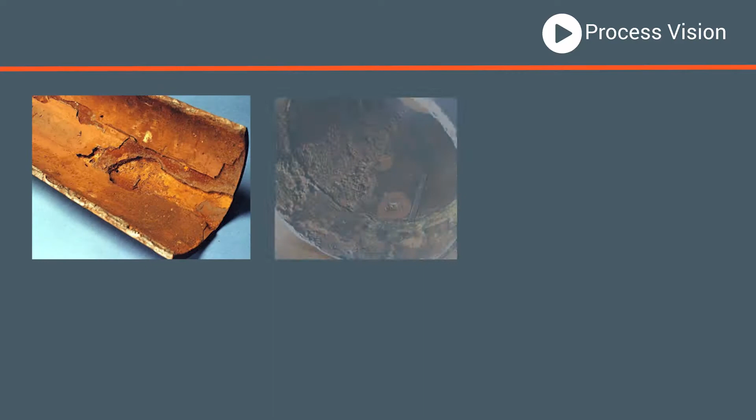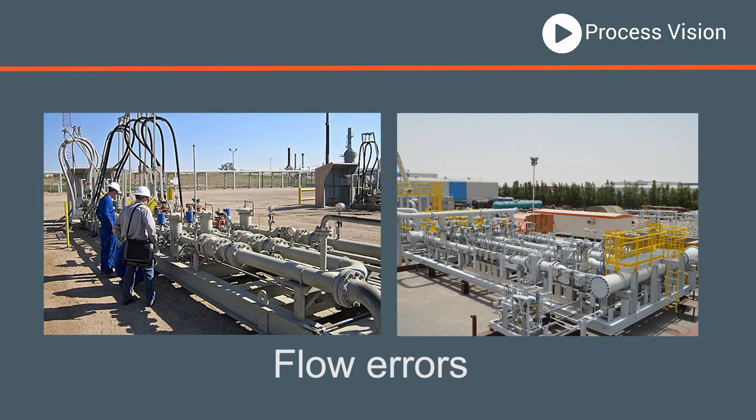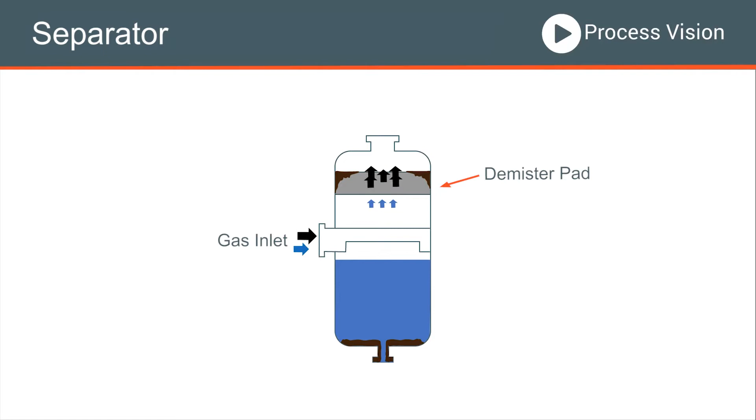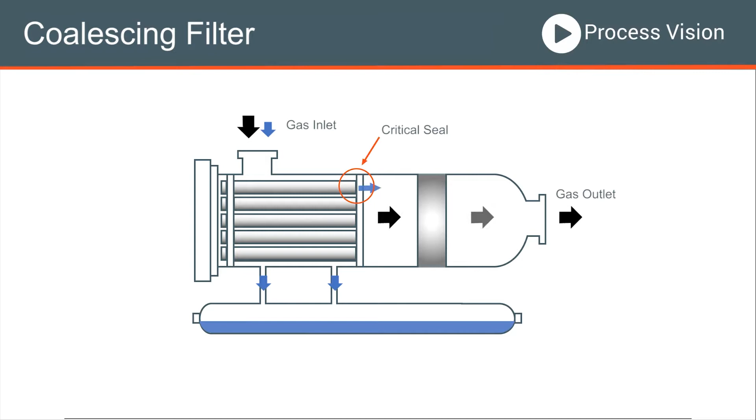Liquid carryover is the cause of the vast majority of process upsets: plant damage, foaming, explosion, errors in flow measurement, the list goes on. In the oil and gas industry, the way we separate oil and gas is quite critical, and yet there is nothing that will permanently and effectively monitor the gas separator's efficiency. And that leaves the operators in the dark, running processes downstream of separators and just having to cope with liquid carryover that happens on occasions or sometimes continuously.

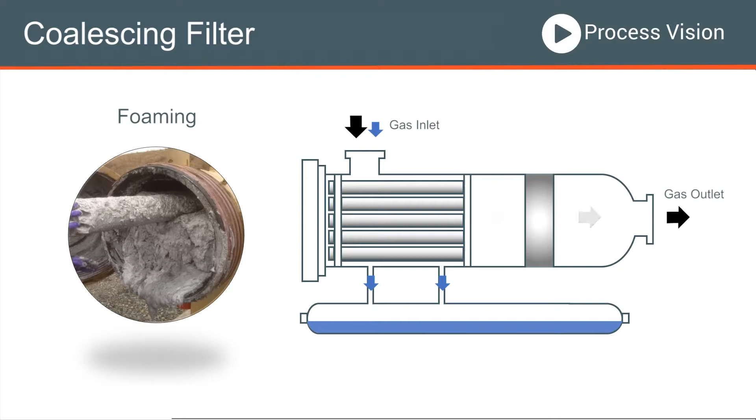A few years ago, we wanted to get our heads around how gas with low levels of liquid behave and perform this simple test. This 2-inch diameter perspex pipe has air running at around the velocity you might expect in a gas pipeline. We are injecting oil in the middle of the pipe.

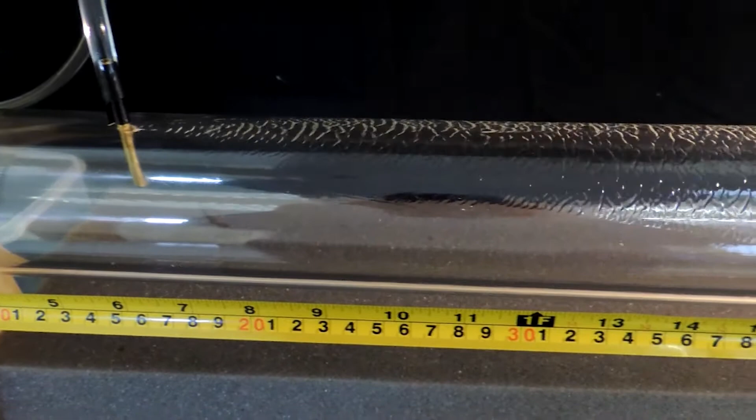As you can see, the speed of the gas throws much of the liquid to the pipe wall, and as we move away from the injection point, the liquid slowly makes its way to the bottom of the pipe. This is where engineering meets art, and you can see what is known as a full annular flow. The liquid forms a film around the inner circumference of the pipe.

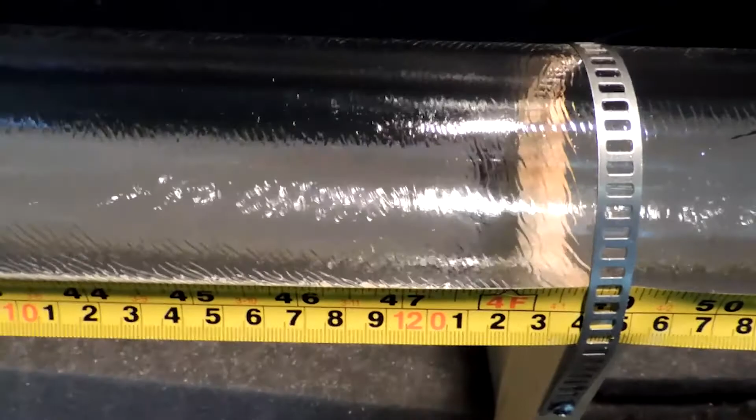Moving further down the pipe, more liquid travels to the bottom and starts to make a thicker layer. As the liquid is only moving through the pipe because of friction with the gas, the liquid layer at the bottom of the pipe begins to move slower than that on the side. The process of the liquid travelling to the bottom of the pipe continues under gravity and would eventually end up with a stream of liquid just at the bottom of the pipe.

So let's take a look at where liquids might come from in a gas network. Starting at the wellhead, water, sand, crude oil that includes natural gas liquids all come up with the gas as it leaves the gas well.

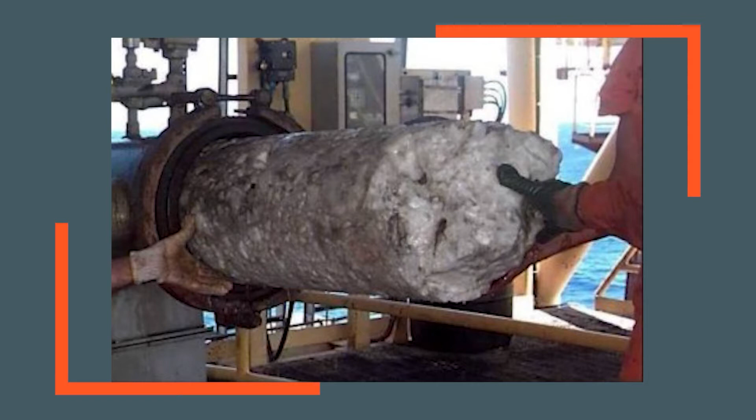In addition, liquids are added to the gas flow at the wellhead. Bactericide, corrosion inhibitor, and hydrate mitigation liquids are commonly present in the gas as it leaves the wellhead area. At this point, the only interest is to keep the gas flowing in a safe condition. Hydrates are the scourge of the industry, and we've got some work to do here, but we think we can detect hydrates at their initial stage.

Several gas wellheads are typically connected to a single gas processing plant. In this illustration, we've shown twin gas processing trains. In many gas plants, there may be 3, 4, or even 5 gas trains, offering some level of redundancy for maintenance. The first action with gas treatment is to remove the liquids and solids in the incoming gas.

This is the most important gas separation in the gas treatment process. The only thing moving forward into gas treatment should be gas. The first process, usually, is desulfurization. This process removes hydrogen sulfide and carbon dioxide. The most common method for removing these contaminants is to use an amine-based liquid.

In this example of a gas treatment tower, gas enters the tower at the bottom and makes its way to the exit of the tower at the top. The processing liquid, in this case amine, enters the tower at the top and makes its way to the bottom of the tower via a number of bubble trays. There is a reaction that locks up the CO2 and the hydrogen sulfide in an unstable salt in the amine.

The amine leaves the tower at the bottom, is then depressurized in a flash drum and sent to be regenerated. It is a high temperature process that releases the gases that have just been captured, and the amine then returns in a loop back to the top of the tower.

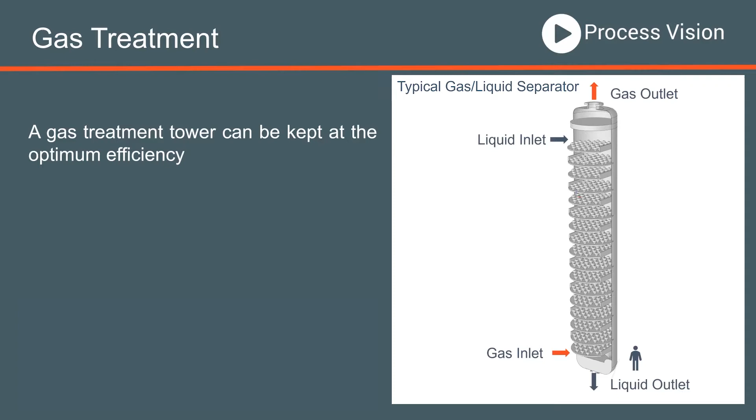There are several triggers for foaming in gas treatment. Liquid carryover causes two of the major triggers. In the short term, surfactants in the gas stream cause foaming. If it happens, the gas flow must be reduced by 50% or more and defoamer added.

The operator monitors the differential pressure between the inlet and the outlet, and once they believe that foaming is under control, gas flow can start to be increased again.

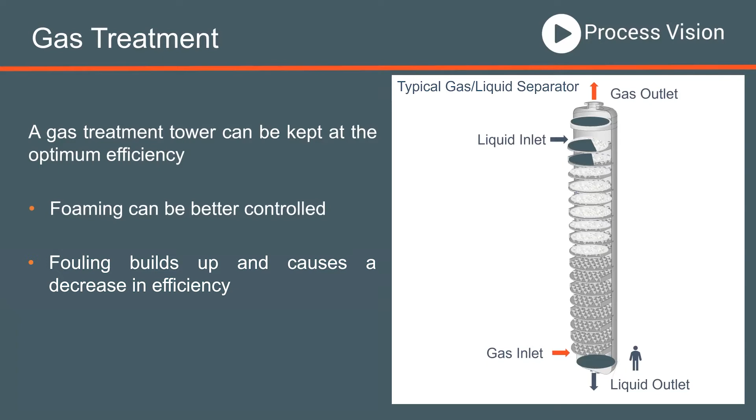Depending on the severity of the foaming event and the plant size, a foaming event can cost between $250,000 to $250 million. In the long term, hydrocarbons entrained in the gas stream will turn to carbon during the processing liquid's regeneration process. This causes a buildup of solids within the processing tower, and if not filtered out, can be a second cause for foaming. Foaming is a big issue with gas treatment.

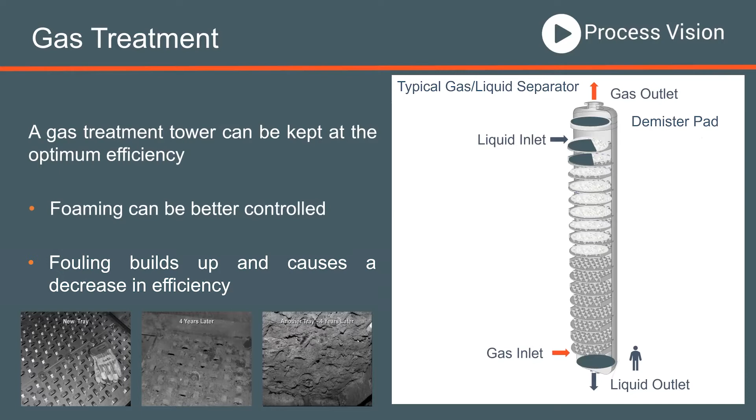When foam happens, it can overrun the demister pad at the top of the tower that separates the amine from the gas as it leaves the tower. The amine carries over and contaminates the liquids used in the next gas processing stage, gas dehydration.

In this process, a similar tower to the previous process is used, but this time a glycol-based liquid is used as a liquid desiccant to dry the gas to a low level. The gas is dried to a level that conforms to the gas pipeline entry requirements. Again, a demister pad should prevent glycol from carrying over with the gas flow.

At this point, the gas is sweet and dry, so the next step is normally to remove as much natural gas liquids as possible during a process known as dew pointing, or NGL removal. Butane, propane, and other natural gas liquids are premium products, and often the gas supplier is paid more for these liquids than the natural gas, which is primarily methane.

This process normally reduces the gas temperature to a low level, usually -20 or -30 degrees C. If glycol is entrained in the gas, it will freeze.

When the gas reaches the custody transfer point to the gas transmission network, it should comply with the network's quality requirements. This usually means the maximum level of hydrogen sulfide and water vapor is specified, and that there should be no liquids or solids contained in the gas supplied to the network.

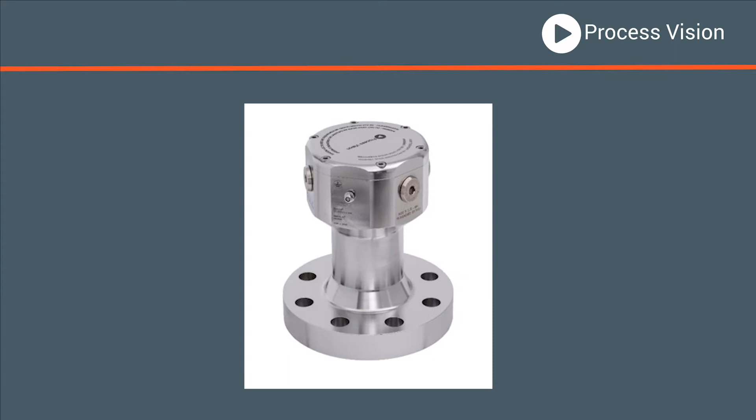LineVu is a camera system mounted on top of the pipeline, and it looks down to the pipe below. So this, first of all, is a normal gas flow. Imagine you're sitting on top of the pipeline, looking straight down from above. This is the view of the pipeline floor, and gas is moving rapidly from left to right.

We use these time-lapse videos to review a 24-hour time frame in 57 seconds. It shows up any contamination event that is below the alarm threshold. A weekly report includes these daily videos and is sent to the client for review.

This footage from a 36-inch diameter pipe is on a gas network. The gas should be compliant with sales gas standards, but the network has installed an extra separator downstream to catch anything that might come across from the supplier.

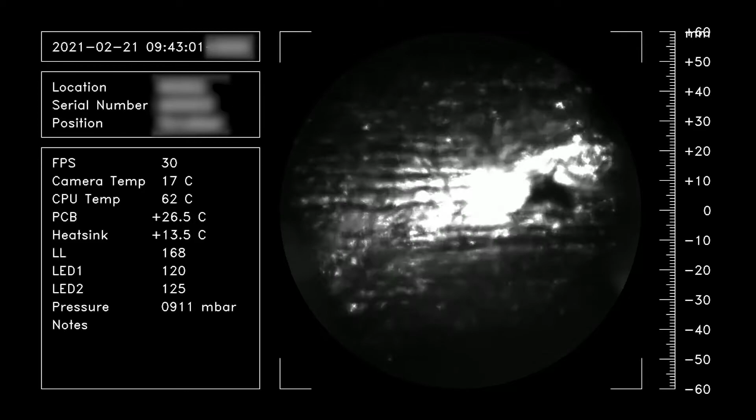In this case, the surface tension is much lower, leading to multiple smaller flow streams. These have been analysed and run at about the same speed as the previous flow, around 2 meters a second.

In this last example, we can see more of a film with crescent-shaped waves on the surface. At each side of the wide film-like flow are more compact snake-like flows. Interestingly, the snake-like flows at the edges are moving quicker than the film flow at the bottom of the pipe.

If liquids and solids enter a gas network, they will slowly travel through the network and accumulate at a low point. If these liquids contain water or corrosive materials, they can cause internal corrosion to the pipeline. Without monitoring systems for liquids, gas networks continue to be at risk. Once in the network, liquid pools at a low point, causing internal corrosion that can lead to rupture, as at Carlsbad, New Mexico.

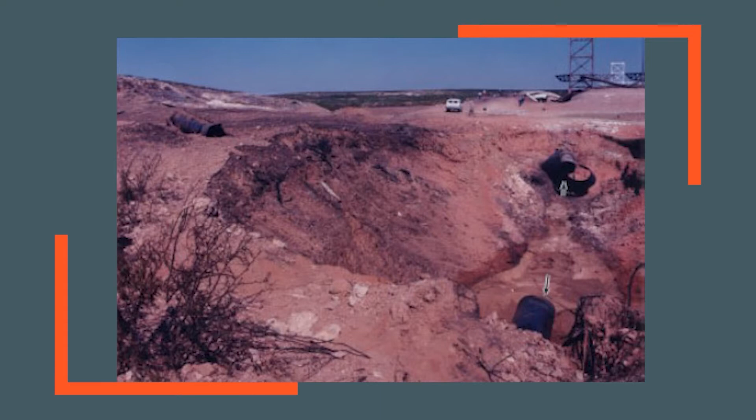The rupture and explosion created a 51-foot diameter crater, with approximately 49 feet of underground pipeline section ejected in 3 pieces from the crater. A large fire ensued, killing 12 people.

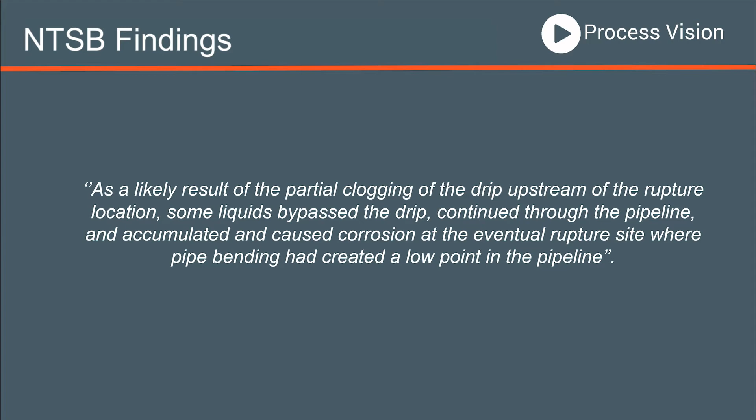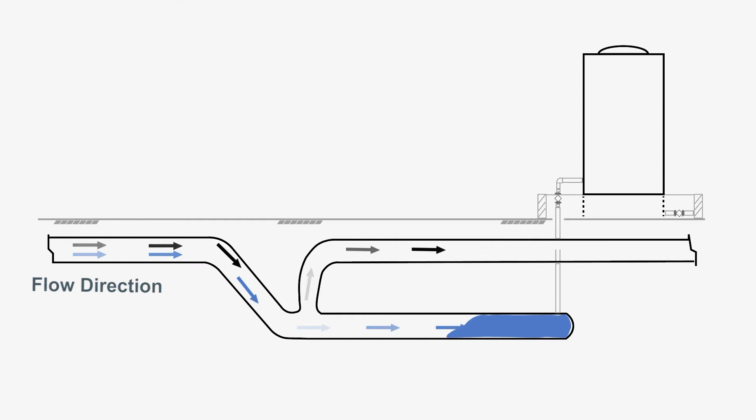The National Transportation Safety Board investigation concluded that internal corrosion was the likely cause of the event. The blocking of a drip upstream of the rupture site allowed liquids into the pipeline section. The drip was a 40-foot long stub line branched off the bottom of the gas pipeline, designed to collect liquids and solids from the pipeline.

The drip was found to contain a blackish, oily, powdery, grainy material at the area of its heaviest contamination. The investigation concluded the event was a likely result of the drip's partial clogging upstream of the rupture location. Some liquids bypassed the drip, continued through the pipeline and accumulated, causing corrosion at the eventual rupture site, where pipe bending had created a low point in the pipeline.

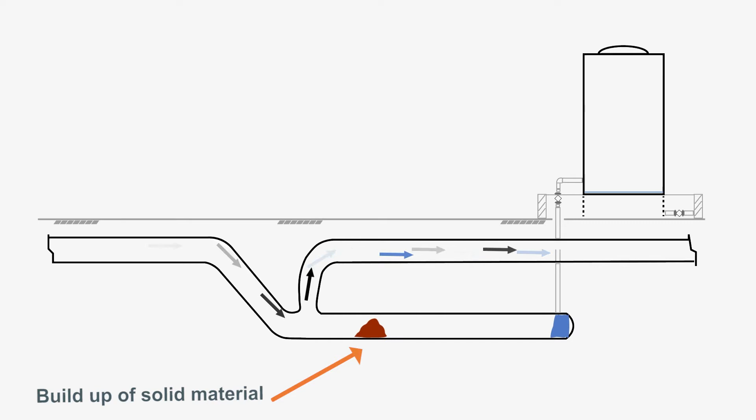Had the network effectively monitored the quality of the gas entering the pipeline, it would likely have determined the potential risk existed for significant corrosion to occur.

So, if there was an effective method to monitor these liquids before they enter the network or before they enter the process, separator faults could be diagnosed, saving suppliers millions of dollars on processing liquids and the loss of NGLs. And networks can optimize pigging processes only to those lines that have seen contamination.

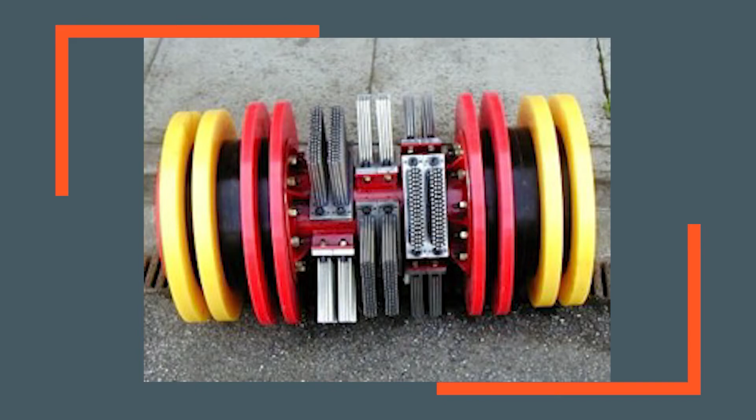When conveying gas in high pressure transmission lines, it's important to move the gas quickly, and to achieve this, a compressor station is installed every 100 miles or so.

When contaminants get into the network, they cause further problems for compressors. When liquids get into gas seals, internal leakage can cause damage to the compressor. In extreme cases, when slugged flow occurs, the liquids do not compress and an explosion is usually the outcome.

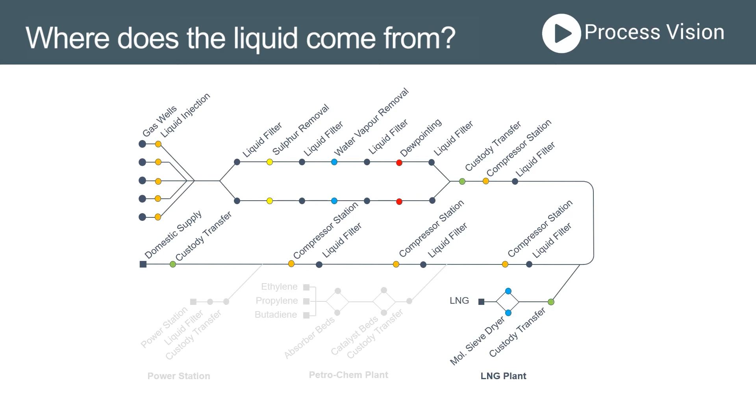The point of use for natural gas could be to convert it to LNG in a liquefaction plant. To achieve this, the gas has to be dried to just 1 part per million or lower in a molecular sieve dryer. Contamination of these dryers causes the molecular sieve to be written off.

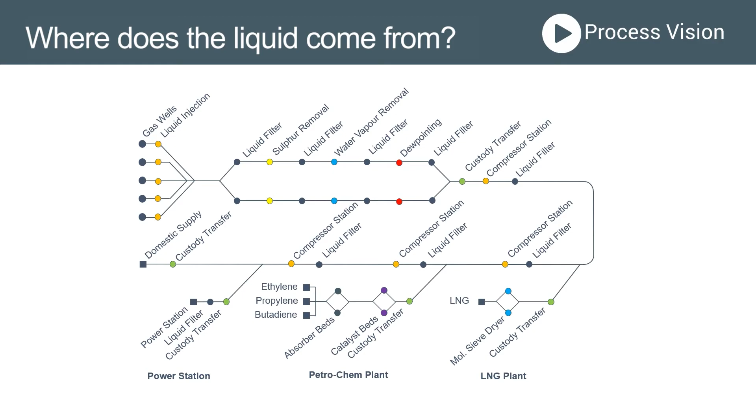Clean fuel gas is an important factor for the petrochem industry and for gas turbine power stations. When liquids are entrained in the fuel gas, they are deposited on the turbine blades, either building up a deposit, or if they are hydrocarbon liquids, creating a hot spot and burning a hole in the turbine blade. Either way, the turbine then goes out of balance and causes severe damage.

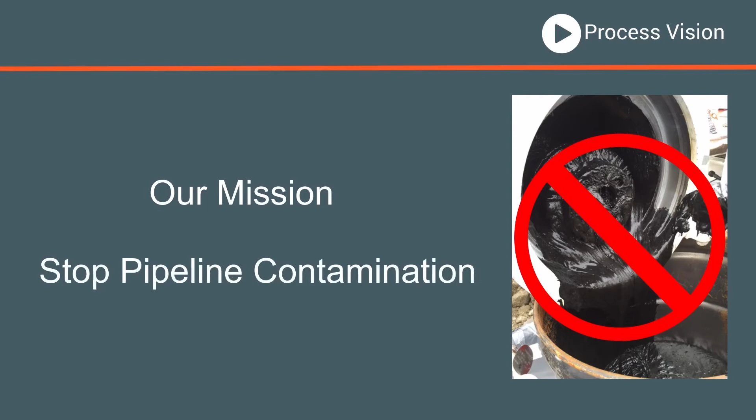Our mission, quite simply, is to stop pipeline contamination. And we have a piece of kit that we hope will help with that.

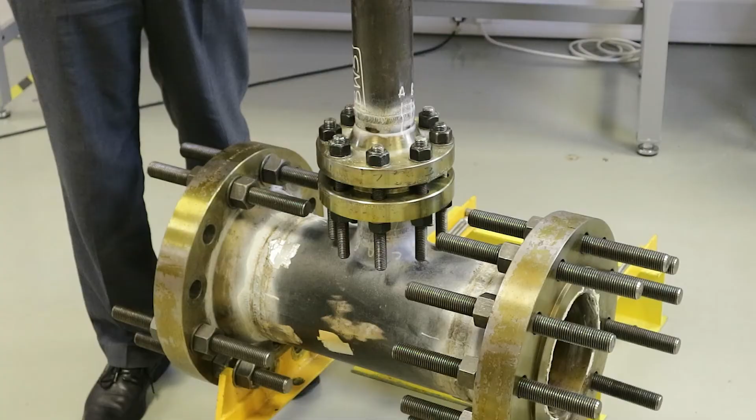The tapping point we've got here is a 2-inch tapping point on an 8-inch line, but in reality we're going into much bigger pipelines, 12-inch, 24-inch or even bigger than that.

The camera can is stainless steel and electropolished. In a hot environment we put a sunshade over the top, and if it's particularly cold, minus 40 for instance, we'd put a heat jacket around it to keep it at a normal temperature.

This space here between the pipeline and the camera can is actually a dead leg. There's no gas moving here, and that gives us the cushion we need to keep those optics clean.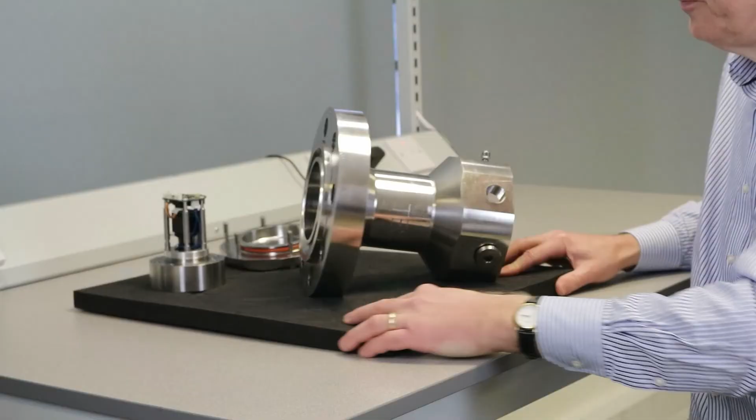Let's take a look at the camera can in more detail. What we have here is 2 chambers. The upper chamber is a certified enclosure for use in hazardous areas, and around the bottom is a secondary containment vessel.

The secondary containment vessel is there so that if we do have a leak on the window, or maybe a seal on the window puck, then we have a safe area and there's no loss of containment. That's what gives us the level of safety sufficient to attach this equipment to gas pipeline networks.

This is the window puck, and we have the camera and the heatsink here for the illumination. The illumination produces a little bit of heat, which we distribute to the window, and this is the sapphire window at the bottom. That's gently heated so that if there are condensing conditions in the pipeline, we don't see condensation on the window.

The window puck assembly slides up inside the secondary containment and is bolted in place.

Safety is a big thing about everything that we do. The camera can goes through 3 different pressure tests. We first press the upper chamber and then test the lower chamber, which includes the process connection.

Then the whole assembly goes through a 3rd test in these temperature controlled pressure stations, which tests all the internal seals. We leave this on for around a week, more if we can, to make sure there are no internal leaks within the system.

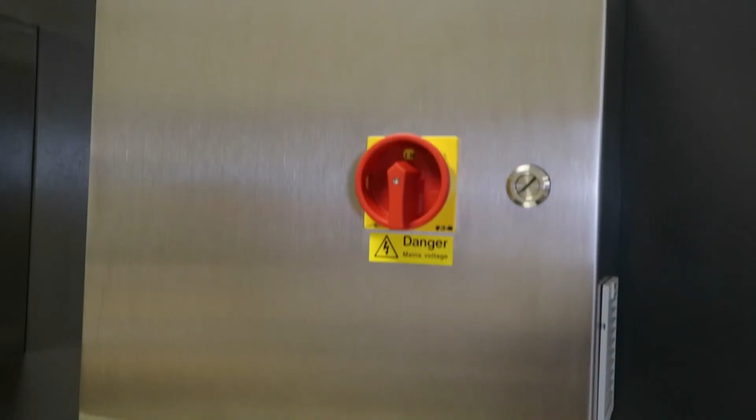Then the LineVu controller is where we save the data, and we always save the data on site. This link between the interface unit and the LineVu controller can be local.

They're normally side by side, but they can be remote as well. This could sit in a server room somewhere with a fiber optic or a copper connection between the two, again with an Ethernet connection.

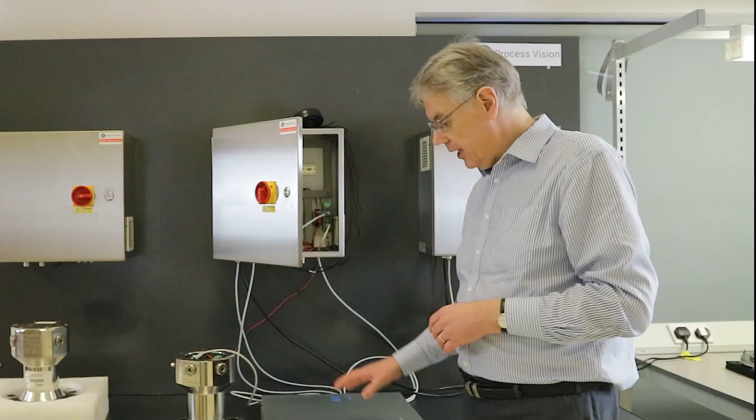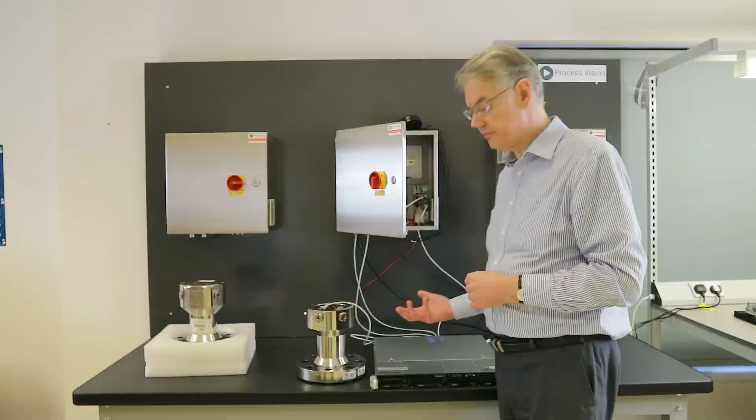If the installation is on a manned site, then from here there's a link to the control room, and we can provide the control room with high definition live video of pipeline activity. It's from the LineVu controller that the web interface is also supplied.

The benefits of LineVu are for both gas supplier and gas networks. Gas treatment plants can use LineVu to optimize the gas flow through the plant, and this will change from day to day with temperature changes and with fouling buildup in separators affecting their efficiency.

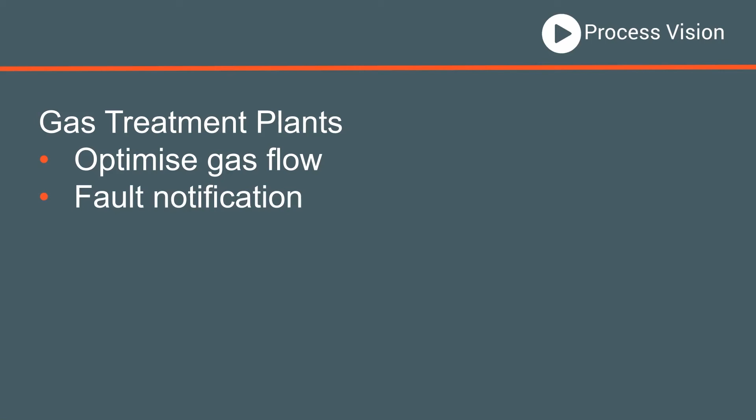If there are faults with gas-liquid separation, they can be highlighted and dealt with immediately, rather than waiting for the problem later down the processing train and recovering using defoamer or scavenging liquids to treat the symptoms of liquid carryover.

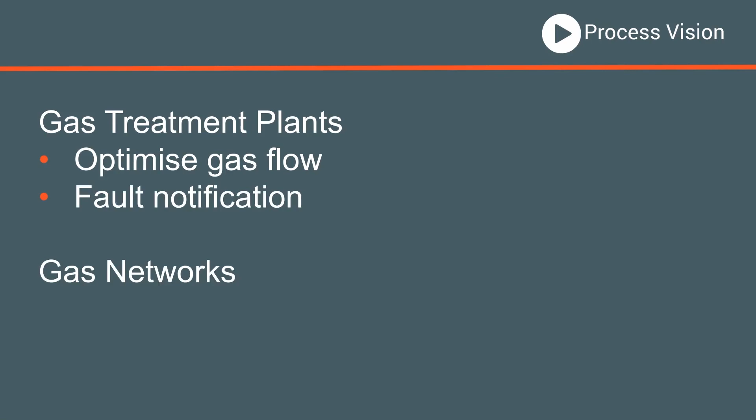Gas networks can use LineVu to ensure the gas entering their networks is free of liquids and complies with tariffs and other legal requirements to transport gas in a pipeline.